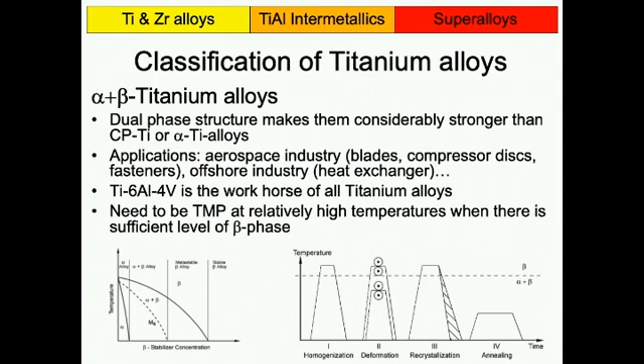And because these alloys are too strong to be processed at room temperature, you can't roll them or anything at room temperature. So they are thermomechanically processed, and they're actually processed at relatively high temperatures. And so what that actually means is they are processed when you have relatively high amounts of beta phase. And you can see that here, but I actually have another graph here, a schematic.

And this is really quite important for you to understand. So it's a bit like a binary phase diagram, not properly, because essentially what I've done here is I start not with titanium, but I say, okay, I start with titanium 6 aluminum, right? And I add beta stabilizers along here, so vanadium. Okay, temperature like we have in phase diagrams.

And so what you find is that once you have a certain amount of vanadium in that alloy, so what we're talking about here is titanium 6 aluminum X amount vanadium, and the X goes up. And eventually we have enough vanadium in the material that at room temperature we now start to see beta phase. Right? That's the principle.

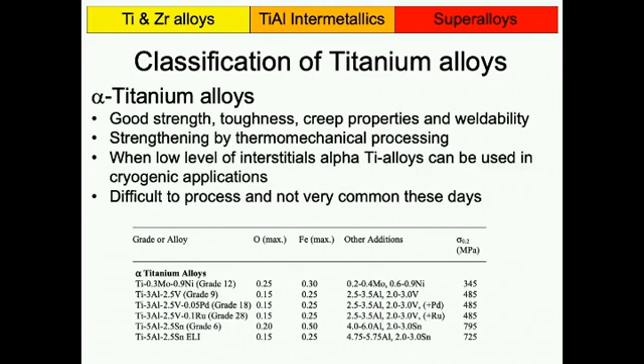It's a bit like retaining austenite, which can also happen in steel. So if you, for instance, have high levels of carbon in steel, you probably learned that you have retained austenite in it. And here, the way it works is if you have too much beta stabilizer, you get that as well. And you might want that. And of course, I mentioned earlier near beta titanium alloys, and they actually exploit that. So we will discuss that later.

So you reduce the amount of phase which has high diffusion rates, and you improve the high temperature capability of that material, particularly creep. It is quite a difficult material to process in general. It's not easy to machine and weld. They also tend to have additions of silicon, and silicon is added here to provide additional solid solution strengthening.

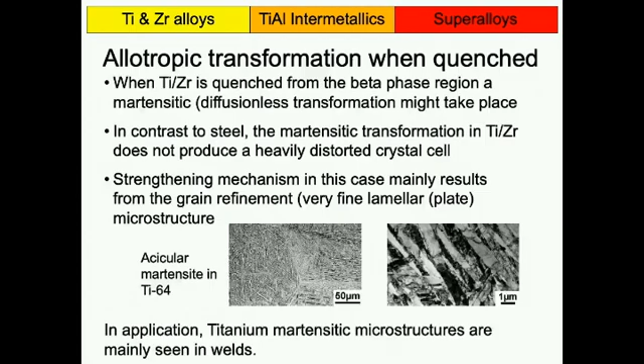Why would you like to reduce the amount of nickel in the engine? Reduce weight. Reduce weight, yeah. Exactly. Titanium is much lighter than nickel. So you want to reduce weight. And that was really the driver. So, I don't know if I can quickly go all the way to the beginning where I had this one slide here. You see, you have titanium at the front here, and then you cross over to nickel.

And the temperature in that engine essentially goes up, goes up, goes up. Highest somewhere here, and then falls down again near the outlet. So you somewhere need to swap over from titanium to nickel, because nickel will give you higher temperature capability than titanium. Now if you have a titanium alloy which has much better high temperature capability, you can essentially push back the nickel a bit further and reduce the weight. That was the thought process here when these alloys were developed.

Nowadays, you still find them in quite a lot of engines, but as far as I know, in the latest engines, like the Trent 900, 1000, XWB Rolls-Royce engines, so the ones which drive the A380, the 787 Dreamliner, and the A350, I don't believe, actually, I don't know, do you know that there's no 834 anymore in these engines? You don't know? No, I don't. Okay.

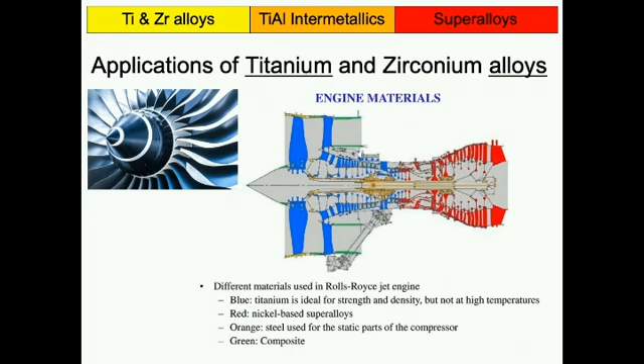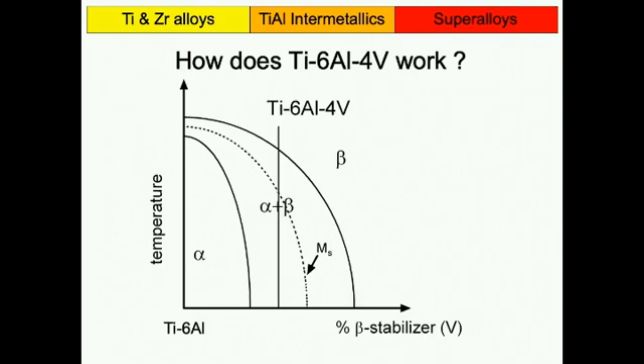So just to put this all a little bit into perspective. But there's still a lot of this alloy in the air because there are quite a few engines which use it. And of course these engines are also still built. I mean, it's not that they just stopped building the old engines.

Okay, one thing I would like to point out here. Do you have any idea why we can't push titanium alloys to higher temperatures? I think it could be an issue. I think you could probably go a bit higher before you see that. Because maybe above this temperature, the titanium oxide is not protecting anymore. Very good, very good. Titanium and zirconium have actually very poor oxidation properties at high temperatures. So oxidation is actually a big problem.

So that's a limit. There's another limit, and that is that titanium is actually not burn resistant at very high temperatures. So it can ignite. And because you have rotating parts, you might also use 834, one of these near alpha titanium alloys, for the blades, where you have the highest temperatures. So the temperature actually rises from the center to the outer part, not just along the engine, but also radially. And if you now have the blades rubbing against the casing at very high temperatures, titanium can ignite. And having fire in an engine is not a good idea. Really not.

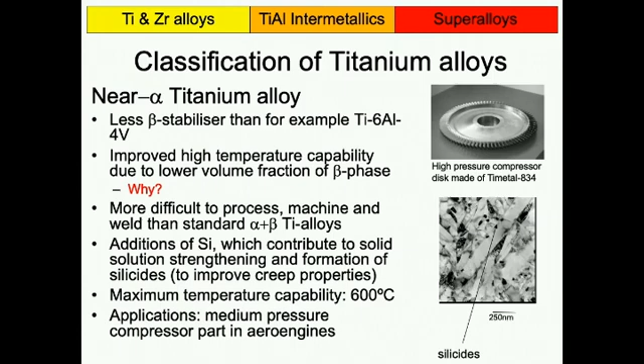So here it's called IMI 834. The company used to be called IMI, a British company, and was bought by the Americans, by Timet. It's now called Timetal 834. The UK base still exists. They're still in Birmingham, and they still produce a lot of titanium. It's a very interesting company.

And here you can see it's quite a complex alloy. So you can see the silicon, which I mentioned. There's actually a tiny amount of carbon. I don't really know the purpose of this. A tiny amount of niobium, which is a beta stabilizer. Molybdenum. Now, I haven't really pointed out that the modern near alpha titanium alloys have replaced vanadium with molybdenum. And the reason for this is molybdenum is a much more slowly diffusing element than vanadium. It's a beta stabilizer, but it has very slow diffusion rates. And for high temperature application, that's very beneficial. But it's the molybdenum which makes it quite tricky to process the material as well.

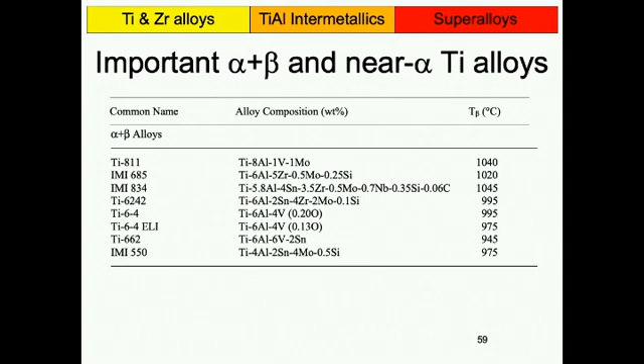And you can also see that even 6-4 has a low interstitial variant. So you can see the oxygen drops from 0.2 to 0.13, or even lower actually. I think these numbers are a bit older. I think generally the oxygen levels are much lower these days in both types. Okay. And then I think that's it.

So the last class of titanium alloy, which I've also mentioned earlier, are the near beta titanium alloys. And one famous application for them is that some of the A380s, I don't believe all of them, have a landing gear made from a near beta titanium alloy. And I guess you all know what the A380 looks like. Yeah, it's a double-decker aeroplane by Airbus. Really always looks